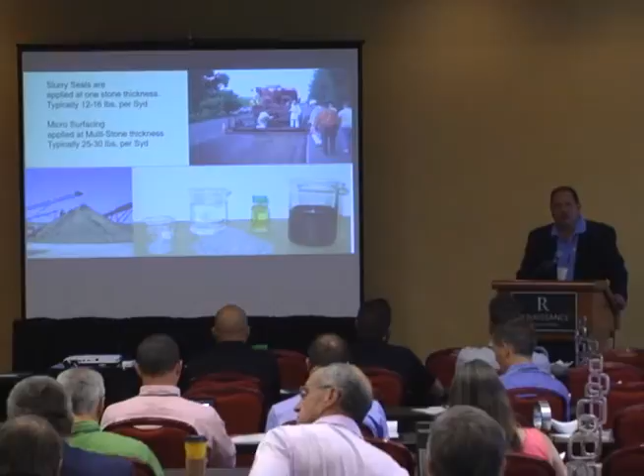We also have water. California, with the drought, the agencies are now demanding that you use reclaimed water, so you can't use the potable water anymore. So we're having the difficulties of trying to figure out how do you manage that in your business. You have additives in different chemistries. So a lot of things have changed here. Unfortunately the picture doesn't really change, and everyone kind of assumes that there wasn't much advancement, but there were a lot of advancements.

So one picture's worth 1,000 words. And so really, when you look at this, I want you to imagine that road that Caltrans showed beautifully in their first presentation, that I-80 with that 3/4 inch rutting, studded tire, chain wear. We see this out west from California into Oregon into Washington into Nevada into Utah. It's a constant problem we have - chain wear just beating the roads, smashing out the aggregates, causing some rutting. Stable road, great performing roads, highly modified roads, concrete roads, asphalt roads - these chain wears just beating the road to death.

So here's pavement preservation, though, in a very harsh environment. Think Lake Tahoe, maybe think the Grand Hyatt right across the lake, Lakeshore Boulevard, 70,000 cars a day, and this is what you see.

This was for Washoe County. They said, you know, we want to start a maintenance program, and we're not doing that. We're doing mill and fills, and every 6 to 10 years we're milling and filling

and we just can't afford it anymore. So to make the case for pavement preservation, we've all heard it, but this picture really just says 1,000 words.

This right here was a conventional slurry seal, type 2 aggregate, 2.5% latex, put down with a conventional slurry machine we know today. Conventional microsurfacing, polymer modified, same aggregate was used in both roads or both lanes. And then we had this over a pavement that had been 4 years old.

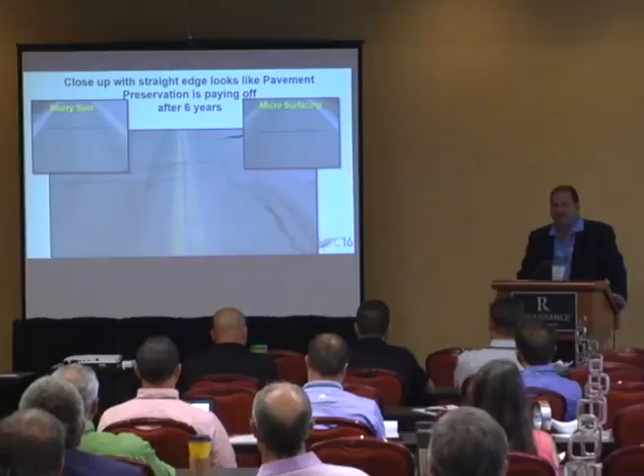We could probably just drop the mic and walk out, like who was that, Kid Rock the other night there? Just dropped the mic on the street and walked away after he sung half a song. It was quite exciting.

NCAT. Let's go down to NCAT, National Center for Asphalt Technology. Right now there's a concurrent presentation going on with Buzz, who's given an in-depth process. I'm going to steal 4 of his slides though.

Obviously at NCAT, we have the heavy vehicle simulators running around the track. These trucks go around so often that the frames actually break and they have to re-weld them. So the trucking companies are learning a lot about durability of trucks and left-hand turns.

So there's NCAT, and you can see that each little test section they got, test section, test section, test section, each little sign there's another test section. Well, we got some maintenance treatments out there. We also have some thin blanket overlays. We have some full sections of polymer modified, different asphalts and different modifiers.

We have Lee Road 159. You got to learn about that. If you haven't followed that, make sure you go to NCAT and learn about this process. It really shows the value of pavement preservation. Most of the treatments we saw yesterday have all been placed down there and are performing pretty exciting. That's a low volume roadway, and then we're taking them out to US 280 for high volume roadway treatments. So I think everyone's familiar with that, but if you haven't, check it out.

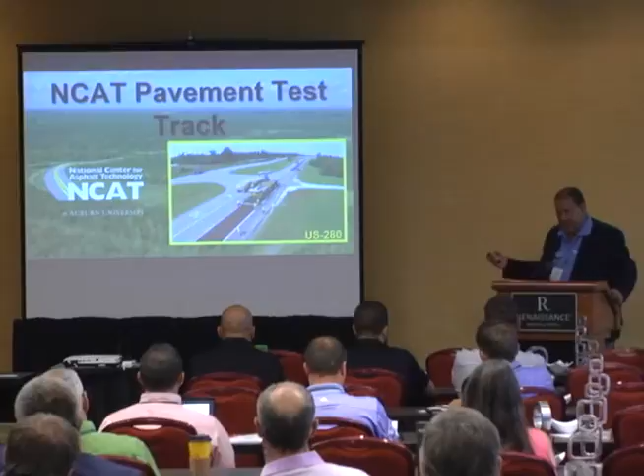But what we did learn from that process is promote real innovation for the industry. So when we took that information, we said, what can we learn from all this research we heard and we saw? The one thing that the guys in my back room learned, and I know other people have been thinking about it, but we really gleaned from this is cracking on this far side here.

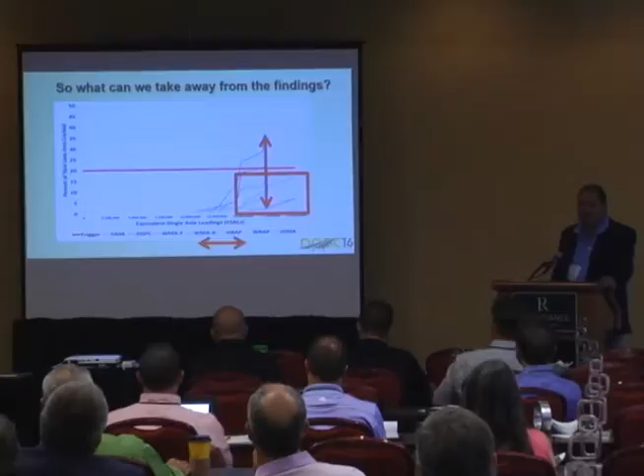But what we see here is, here's a highly modified, high mod, same aggregates being put down, and we don't get crack propagation until 15 million ESALs. That's quite an extension there. I mean, that's saying the value of polymer modification is really huge. There's a lot there. But we're also seeing, look at the amount of cracking that occurs and the speed of cracking that occurs versus that. That's a huge delta there.

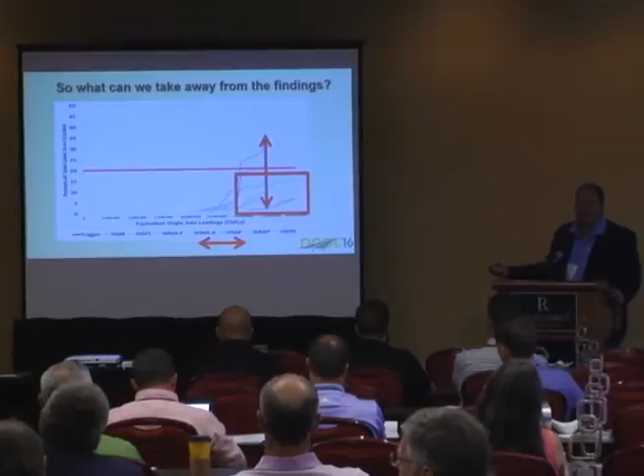So we take that and say, well, how do we apply that? I mean, this is great, this is dense graded pavement, but how do we apply this to maintenance treatments? How do we go from paving at $1 million a mile to something that, how can we learn and put that to pavement preservation? So we do this through pavement preservation, looking at taking that high mod technology and try to extend those lives, move those curves right, the most cost effective way, in thin versus a 2.5 inch or 1.5 inch mill and fill.

We'll talk about that one later.

So what's new and exciting with polymer modification, and how do you get those into maintenance treatments? A 4% polymer modification gets sticky, gooey, gummy, it doesn't do well, it's hard to work. So how do you get something from 4% up to 6% and get performance?

It's very difficult, hard to emulsify is SBR. Historically, some of the Nova chip, Nova bond polymer modifieds for the ultra-thin bonded wearing course, we're about 3% modification.

SBS latexes are great, very effective, but once you start getting into 6%, or having to go to 8%, you start having the chemistries of those latex emulsions override the chemistries in the polymer modification—override the emulsion, I should say. And then you also have the performance from lab to field, which is very different.

So I take a sample from the lab and send it off to Caltrans and say, guys, get me certified. And they say, great, we'll certify you. We're gonna first heat this up, do a distillation. We're gonna distill this wonderful emulsion you sent us at 500 degrees, pull it all out, and test this material to see if it meets spec.

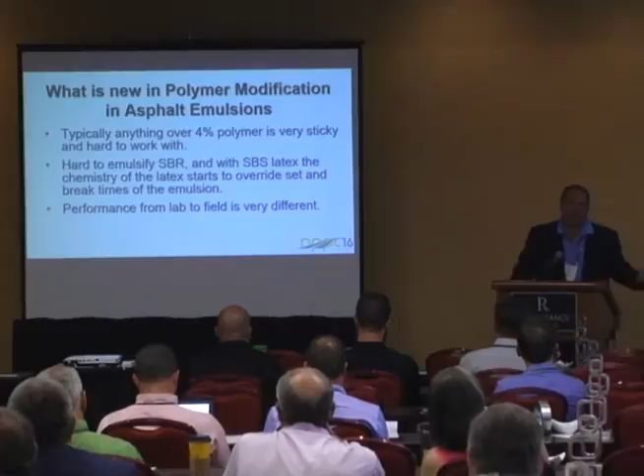So how do you get a low temperature distillation evaporation process to better mimic what we really see in the field? We've come up with low temperature distillation evaporation processes, doing very thin films, letting them naturally evaporate in an oven, keeping it below 180 degrees. That's about the hottest surface temperature I think I've ever seen—right around 180, in Palm Springs when it's 121 degrees, and I'm not quite sure why I was out there.

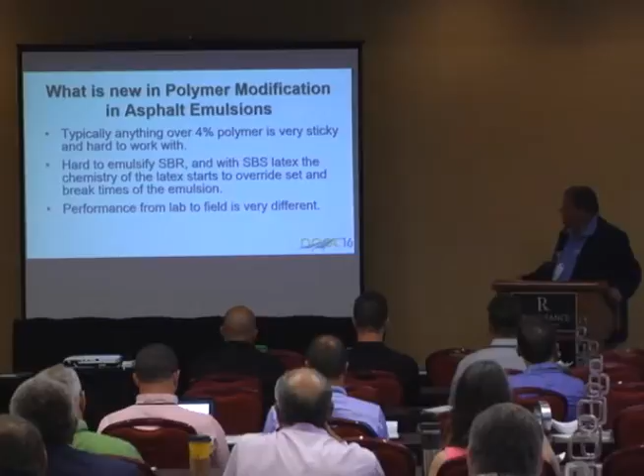So this might be a specification for the future. And this is really looking at—you look at that spec—what do most specs for emulsion have for microsurfacing or CQS?

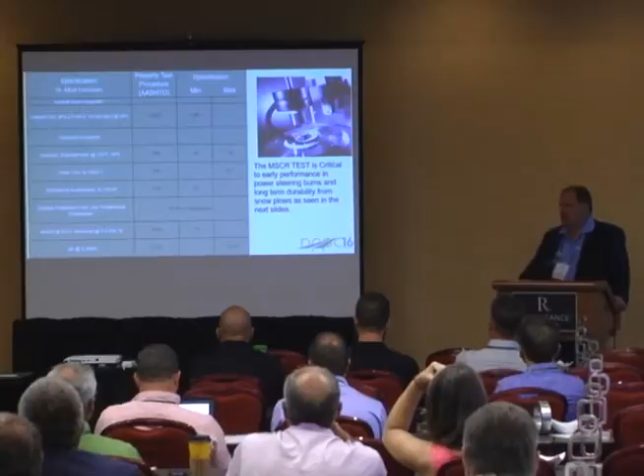Number one would be pen. You want to know how hard it is, and that pen range would be between 40 to 90. We don't have a pen spec here. One might put torsional recovery, a boiling point, or a softening point in a specification. We don't have that in here. We do a low temperature distillation, or this evaporation process, so we're not age oxidizing the pavement. We're trying to truly mimic something that occurs in real life.

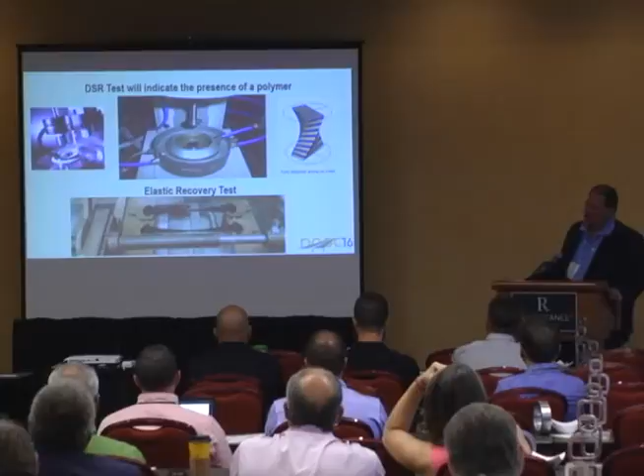but it only tells you part of the story. Elastic recovery tells you part of the story too, but it only tells you that you have presence of polymer at a 500 degree distillation. The elastic recovery process here—basically you stretch the dog bone out, cut it, and measure the recovery. It tells you if you have polymer or not.

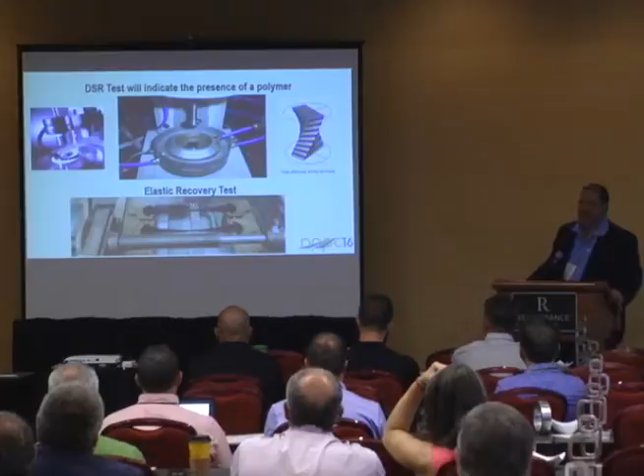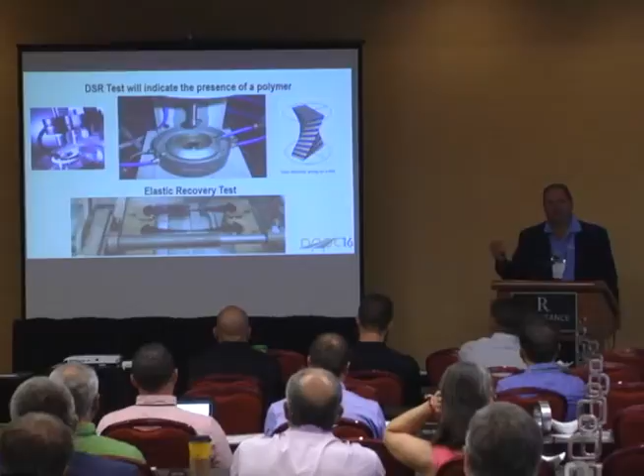The problem, though, is with this test—here's the polymer, we're just getting a little dog bone. The geometry is completely wrong compared to using a DSR. So if we don't change the geometry of our sample, this really doesn't give you a lot of meaningful data. I haven't seen too many roads that get stretched out this far. If they do, we have another problem—it's usually called the San Andreas Fault.

Other elastic material behaviors - we're pulling it, seeing the strain, we'll see flexibility. Well, if we don't do that, our roads - usually we don't pull roads too much, don't pull the rock out. Usually we have little micro strains, little pressures. It's a tire just zipping over a road at 60 miles an hour or going over at 5 miles an hour. It's a very quick strain, very quick release.

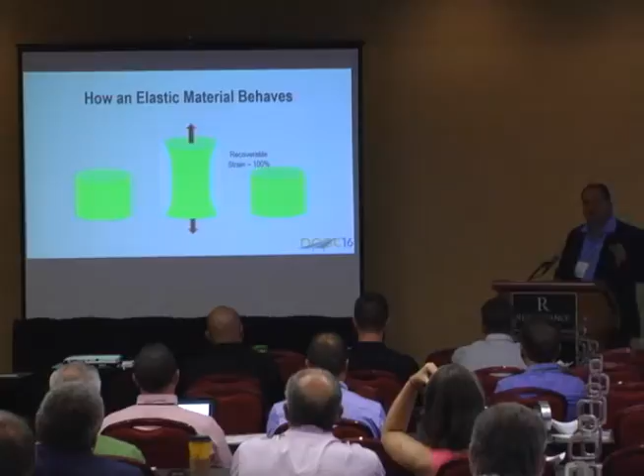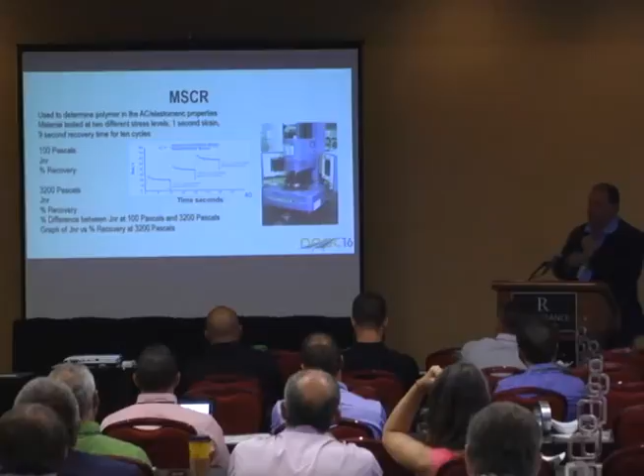So how do we better mimic that? Well, that's by using the MSCR and the DSR. I have these slides in here so if someone wants to read them, they can look online, this is to save some time. Ultimately what we're looking at here is we're going to put a small sample on the DSR, run the MSCR at a frequency sweep, 10 cycles. What this does is it basically puts a little microstrain at a temperature, and it's simulating the recovery.

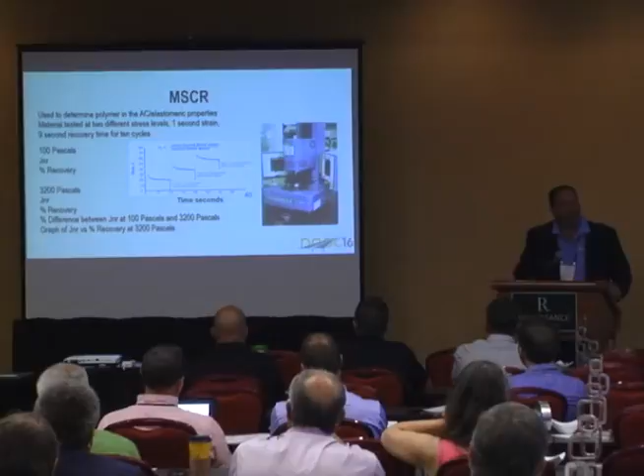So we want to measure - this is where I'd invite you, if you have questions, to talk to Codrin right over here. We want to measure the frequency of the strain and the recovery. That's going to tell us - this slope here is going to tell us the modification. We're going to continue to do this multiple times, 10 times, so now we get a good average. Because that dog bone test, we have 2 samples, we pull it and we cut it. Well, I have 2 samples and 2 averages - do I fail or not fail? I don't have a lot of statistical capability except rerunning the test, redoing distillation.

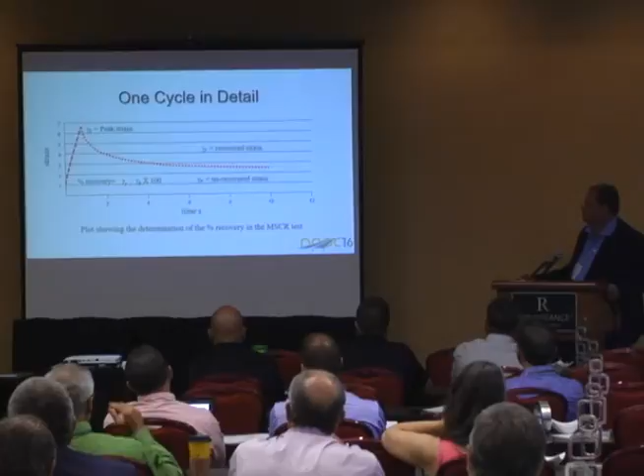But what does that mean? We have this turn, microsurfacing. One of the big complaints we get a lot with agencies, cities and counties, inner city, is power steering. Man, I did the street, we did the parking lot, we have parked cars, and I have power steering burns. And so every agency that does it on a consistent basis is trying to warn the public, saying be careful, drive through, but really don't just crank on those tires. Don't tear it up, be gentle. It will get better next year, let it go through the winter, it will get stiffer. And they always do, they always get better. But agencies don't like to have to explain that to the traveling public. So if I can reduce it by 80%, that's a huge reduction.

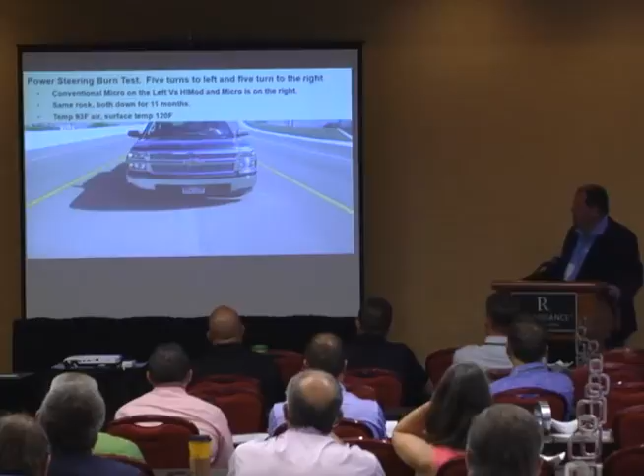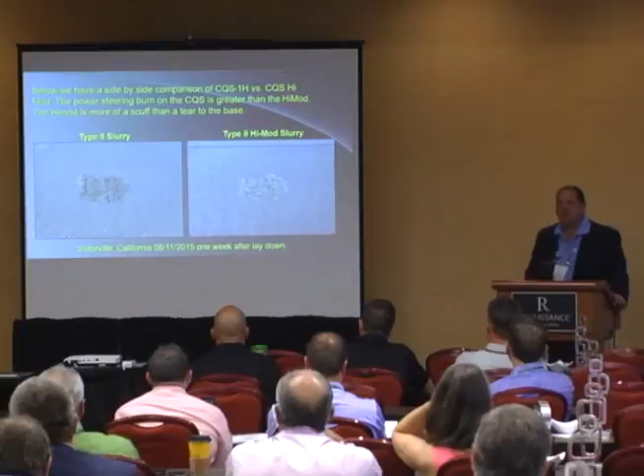And so by using the MSCR test and turning that to torsional recovery, it turns very much into, if you turn your car tire 10 times back and forth, what might it look like? Here's a conventional, and here's the high mod. Same rock, same oil content, same trucks, same crew. But really what it tells you is that highly modified material gives you that resistance to early traffic, the durability.

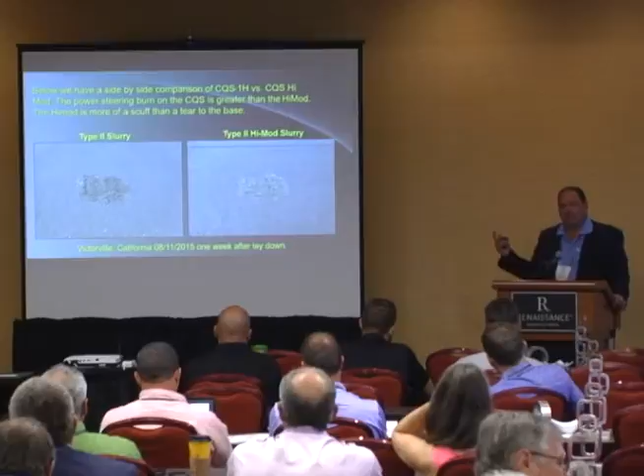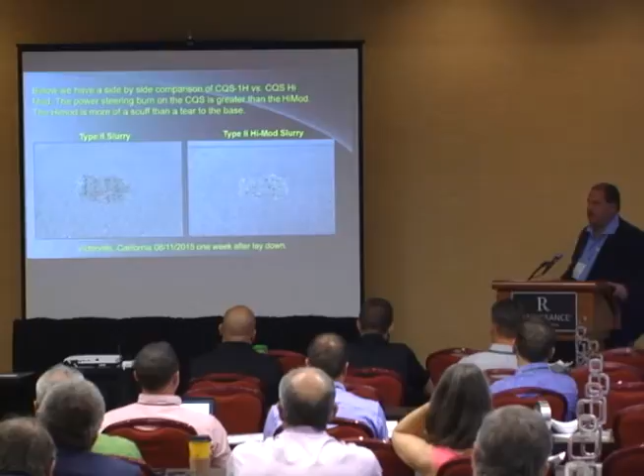So by utilizing this new test method and protocol, we can determine what that softening point was. Now, technically, historically, microsurfacing might have a softening point of 140 on the high side. With these specifications, we can get the softening point up to 160, 168. So it's just creating a tougher, harder, more durable mat right in the beginning when it's the most tender, its most fragile state, right in construction.

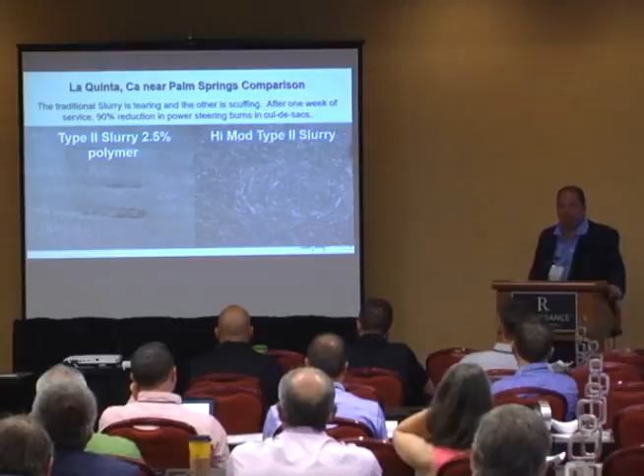Now we go up to New England. So that's what we find critical in California. We go up to the guys in New England and Northern California, and their complaint is snowplow damage. How do I get my durability up? How do I get snowplow resistance? The plows are taking it off, the plows are scarring it, the delaminations from the plows - harsh environment. So we have some testing we're trying to develop for that, trying to set up specifications.

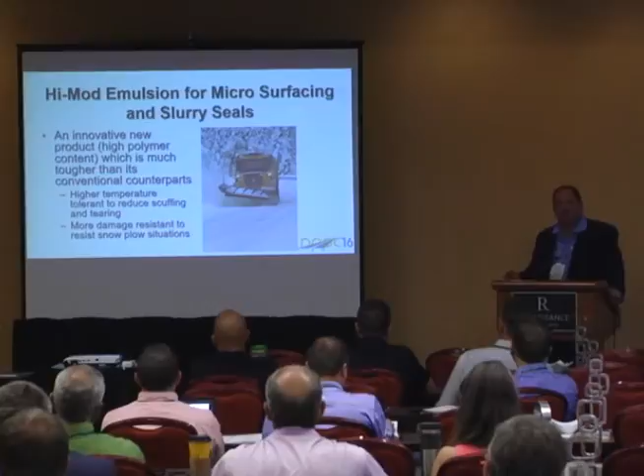So this would be some new technology on the mix design side. If you did a slurry or micro design, this might be your new side on this. We're going to use the Cantabro. What the Cantabro is, is LA Rattler. Every agency that has a lab, has a rock lab in there, has this test. It's just an LA Rattler. Everyone knows it - raise your hand if you know this one.

That's my first job in the lab, was running this thing. So if you don't know, I can't really hear all that well because of this. With that, we're going to put the sample in there. We're not going to put the charge medium in, just the sample.

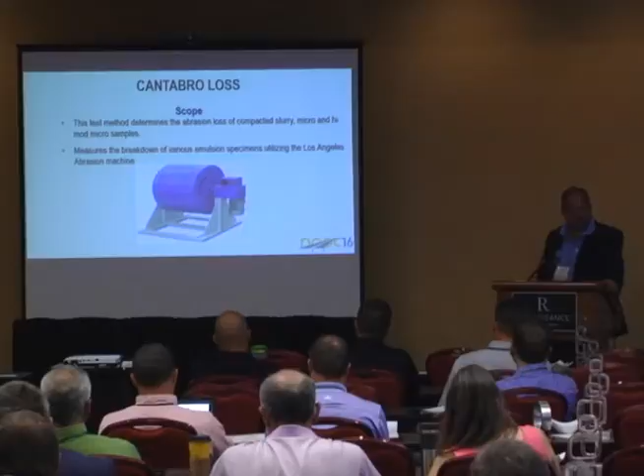It has a paddle, if you've never seen this. It's just a drum with a paddle, no charge medium at all. We're going to let this run 300 times for the Cantabro, or Cantaburo, depending how good your Spanish is. That's who developed the methodology.

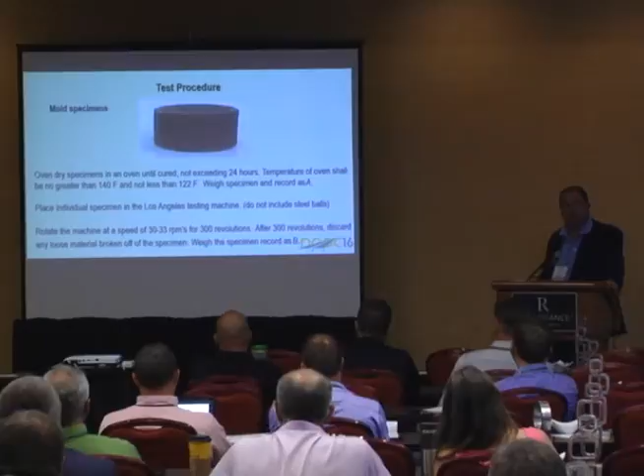We're going to put our sample that we've compacted with a gyratory compactor into the Cantabro. We're going to let it run 300 revolutions and measure the loss. So what does it look like after 300 revolutions?

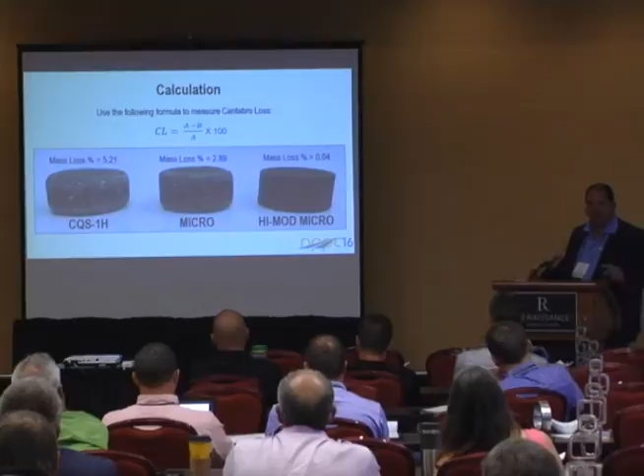Well, here you are with the durability. This is a traditional CQS, slurry seal, non-modified. Then you have your traditional micro, could be 3.5 to 4% modification. And then you have the high mod, which is probably up to 5.5 to 6%, but we're not worried about the percentage of polymer because we have a good test procedure to identify this durability. Same rock in this case, every one of these, same type 2 aggregate, nothing's different, same asphalt content, same residue, put in the Cantabro.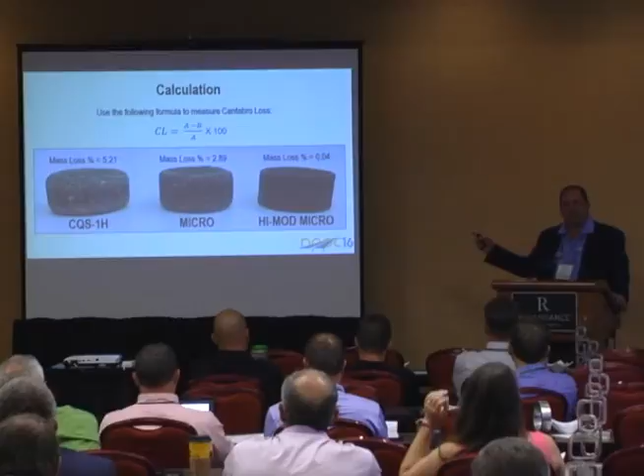So which one do you want on your roadway? Which one has the possibility? Now, if you think about the improvement, we go back to that first picture up in Tahoe, and we saw that CQS slurry with some abrasion. It was time for a micro on top of that. We saw the micro performing, but with the high mod, we're not seeing the damage there. This is the expectation of maybe 3 to 4 years longer life, going back to NCAT, where we saw that extension in traffic before we saw fatigue cracking or cracking develop. This is what we expect to see with this.

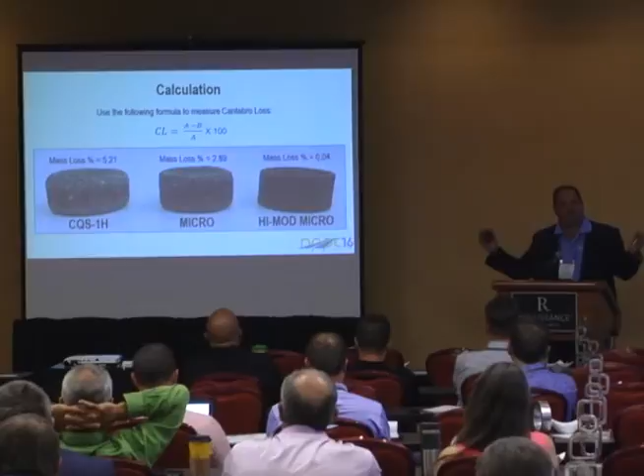Just some other samples.

So this goes to a slide when we're doing some work up in New England. I guess it was Dartmouth in Massachusetts, did a fantastic project. They went and looked at several different deals. They said, we have some plow damage, how do we address this? We need a control section.

We're going to add some different fibers. We're hearing the fiber people say that it can reduce cracking, it can increase durability, and those little fibers would help us with that micro abrasion. So we'll put some fibers in there. We'll try two different fibers - a polyester, a fiberglass fiber, and then we'll try just a high mod.

So here's those Cantabro results in a graphical presentation. And if we go up there today, and I've gone back there, it's a good test section. We had 2 different machines, so we might have had some equipment issues, but we're pretty much seeing what this result here tells us is what we're mimicking in the field. We are seeing one that's performing much better, the high mod. The other polymers or the fibers are performing very well, and the traditional micro is performing as expected. But we are seeing some differences.

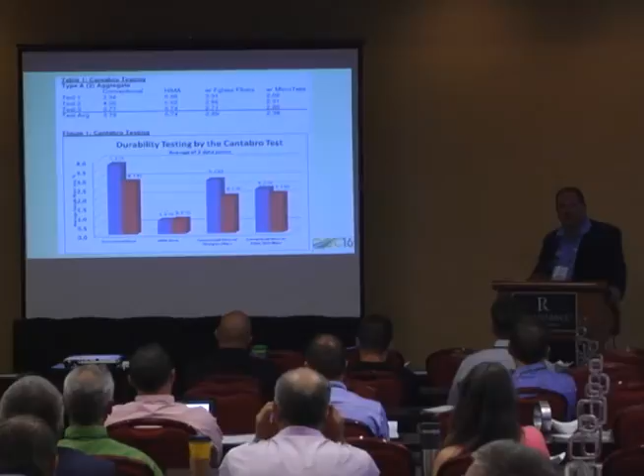This same test result, I believe down in Westchester, in Connecticut, is also being mimicked again. And the contractor is stepping up and said, I'm going to take out the deviation of the machine and use one machine and do all the processes again, just to verify what he had, to take out any construction bias.

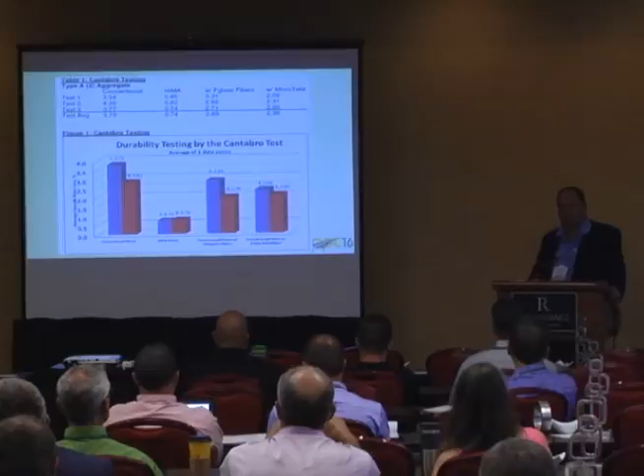There's the first report. This was in 2013 when they did this project. Been out there last year, looked at it. Getting ready to go back out and take a look at it again with another group and see if we can get it right and have a meeting with the agency. But they were here this week and talked to them, and they say it's performing fantastic. The only complaint they had on the whole project was the color of the aggregate.

They had a rock that was traditionally kind of a pink rock, and when the plow abraded it, this pink hue came up, but the paving rock mostly performed out there is a very dark granite. So they look at it and say, well, my road turned pink. We said that's easily fixed - it's just a function of spec'ing the color of rock and going with a darker rock. We spec'd out the darker rock, and they haven't had any issues last year or this year. Everyone's really very pleased with it.

Once again, looking at that specification, you don't have pen, you don't have a softening point. What do we have there?

We've got a sieve - there's a traditional one. The sieve is important, we have a residue, that's important, and we have an original DSR - that's unusual, never heard of before. So this is a completely different specification in this process. If I tell you something twice, it's really important, because that's how I let people know if I said it twice, it's very important. This is a different specification than what we see out there in the marketplace.

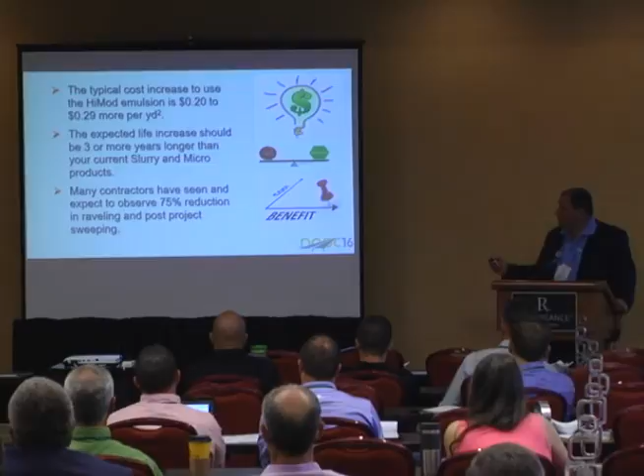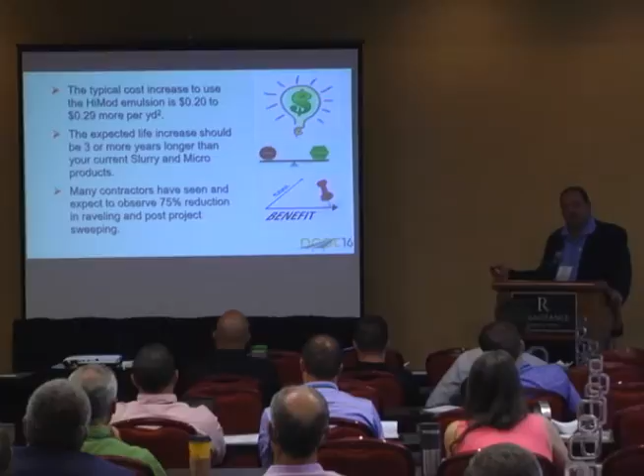The cost varies on thickness, could be 20 to 29 cents more per square yard. Expected increase, we hope to see 3 years - we're only at 2013, we see 3 years of performance, but we do expect to see it with the Cantabro results and the power steering results. We do believe we'll see that increased benefit, because most slurries or micros fail not because they ever really failed - they pass initial construction, they just wear out, they get thin. We're already showing you a wear test, I think it's pretty exciting. Will get us there.

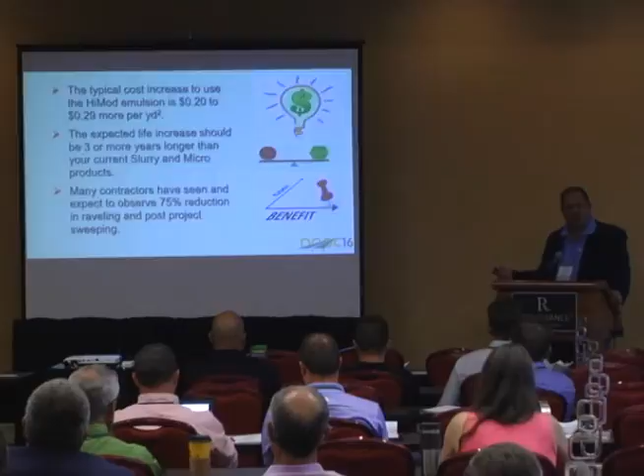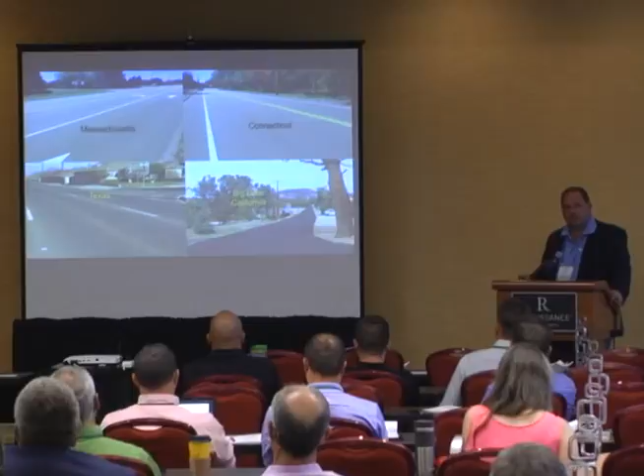Things we have going on: Massachusetts, coast to coast, Connecticut, Texas, Big Bear California - snow environments, hot climates, cold climates, low climates, hot humid climates. We're getting everything covered.

Now, what's next? What's the other complaint we get? Oh, slurries and micros, they crack too quickly. Yep, they just crack - I mean, I put them over a cracked up pavement. I'm not quite sure why we're putting them over a cracked up pavement, we don't recommend it for cracked up pavement. It's keeping good roads good, right?

So we're looking at now, and the boys in the back room are doing a fantastic job looking at this - they're taking a modified Texas overlay tester, which applies a strain to a sample of aggregate. This is what we're seeing with a slurry, we're getting to these cycles here. With a micro that's modified, we're getting to these cycles here. And then with eFlex CR, which is crack resistant, what we did here is increase the asphalt content. These are not all equal, but I think they may be all equal in asphalt content for this testing parameter, but we went with a higher asphalt content across the board to get the most flexibility we could in these results, and we're seeing this huge gain there.

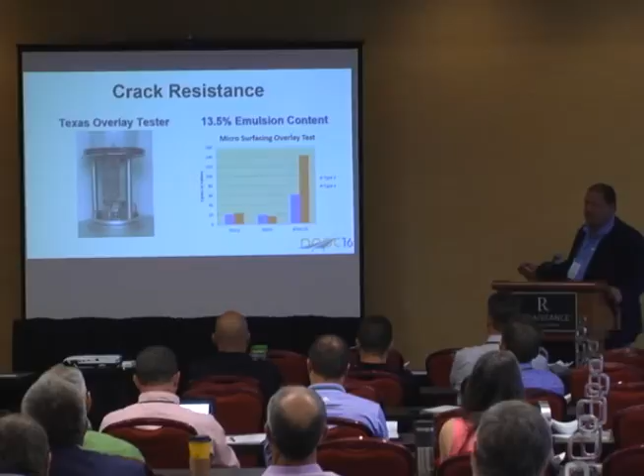But so that's neat, we have a laboratory predictor. Now we had to take these predictors, move them out in the field. We did some projects down in Texas in some alleyways and parking areas near some schools, and had some buses loading over it. So we're monitoring, and we have a team out there doing a fantastic job evaluating the existing condition and going back on a regular schedule to review it. But what we're seeing is the crack reflectivity is reduced dramatically.

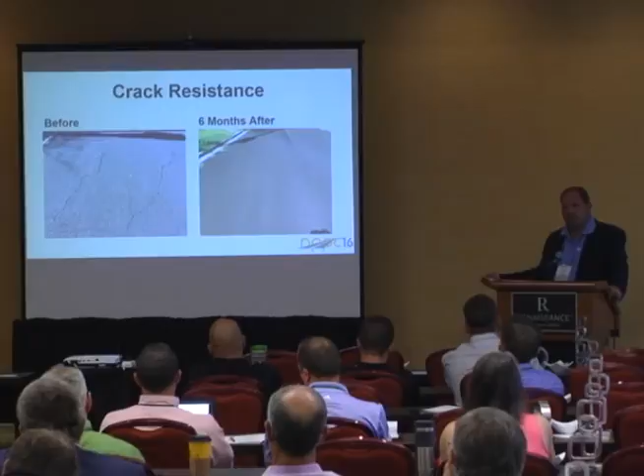This is something we saw in Utah when we did it in 2013 and 2016. Historically, these working cracks, you'd start to see spalling, and you'd see them back at the same size. We're not seeing that after 3 years, so we're seeing great wall adhesion and great durability.

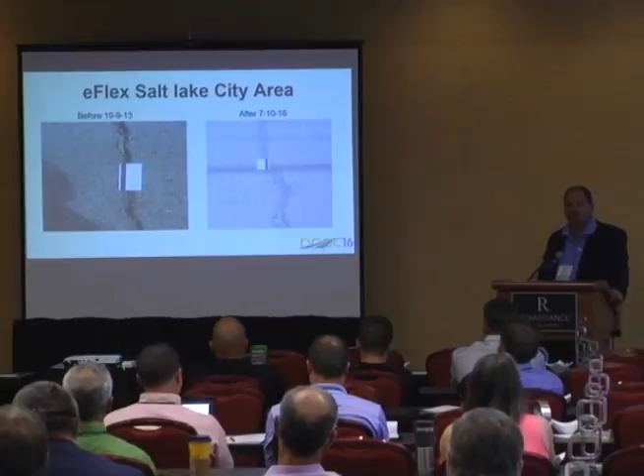Is there a hairline crack there? Yes, there is. But if we had that in a controlled section next to a regular conventional slurry or micro, I guarantee you that crack would be looking much worse after 3 years in the Utah market. So we're very excited about that performance.

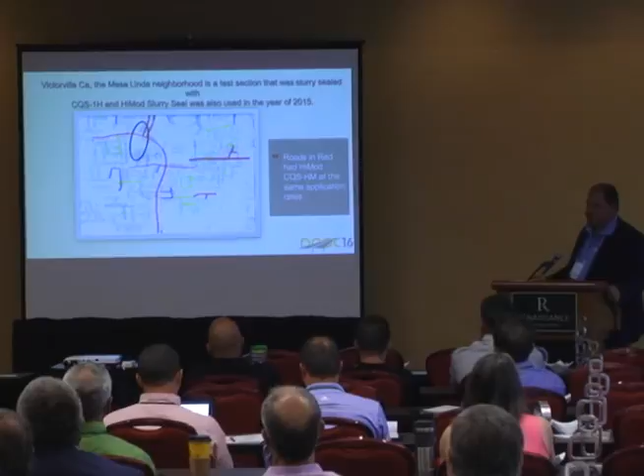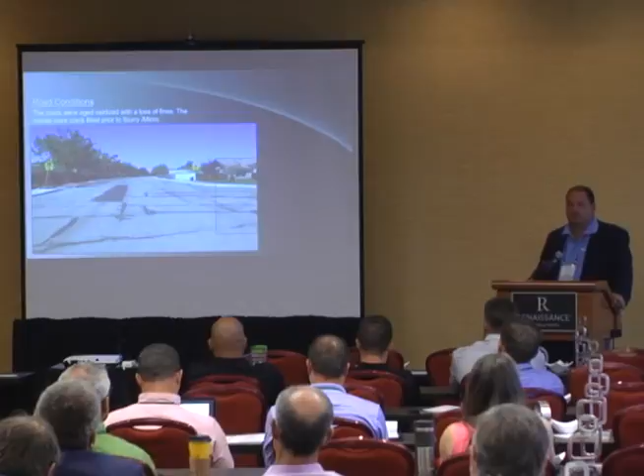Obviously, we do lots of projects comparing different products. This is just a project map showing comparisons, map cracking, checking out all the cracks, documenting, seeing what we have. This is up in Victorville, the high desert, where we get a lot of freeze thaw. It wouldn't be unusual in Victorville in October to see temperatures of 98 to 100 degrees, and the next night be 32. So we get huge temperature swings, lots of thermal cracking, lots of movement up there. We're evaluating that road, and hopefully we'll give you some great data and perspectives on that in the future.

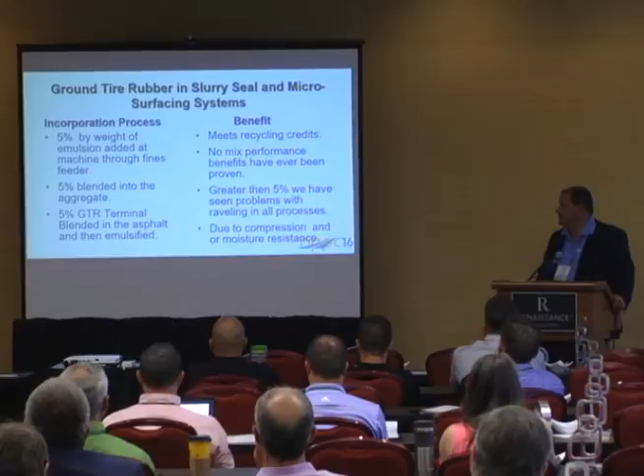Now we're going to move to the ground tires. I had a lot of things I said we'd talk about today, but we're going to move past those into the additives, into that aggregate section we talked about.

So we have ground tires in California. Our legislators are just crazy about ground tires, cuckoo for them really. They want ground tires in everything. There's a mandate, preferential points, you get engineering credits back, all kinds of crazy incentives. So everyone's trying to figure out how to put ground tire rubber in their mix.

Here are 3 ways that are used in slurry and micros currently throughout the state. We have 5% by weight of emulsion added at the machine through an extra fines feeder. We have 5% blended into the aggregate. And we have 5% GTR, a terminal blend asphalt, being blended into the asphalt. So you've got 3 ways of getting it in there.

LA County, San Bernardino County, Riverside County, and San Diego County all consider all 3 methods acceptable and legitimate ways of getting it in there. There's no proprietary issue around that - it's whatever the contractor's choice is. Here are the 3 options. It meets the recycling credits and makes us feel good.

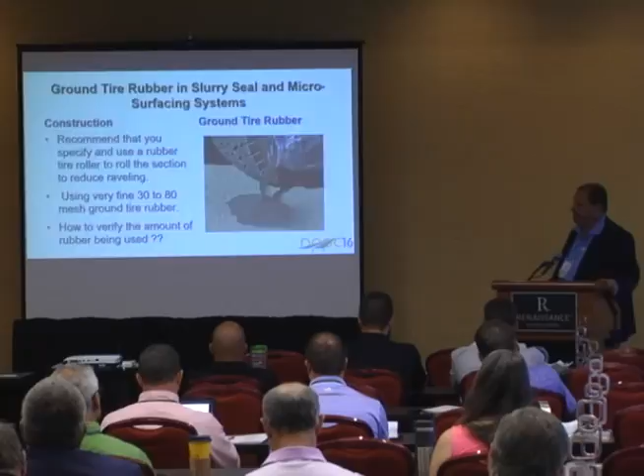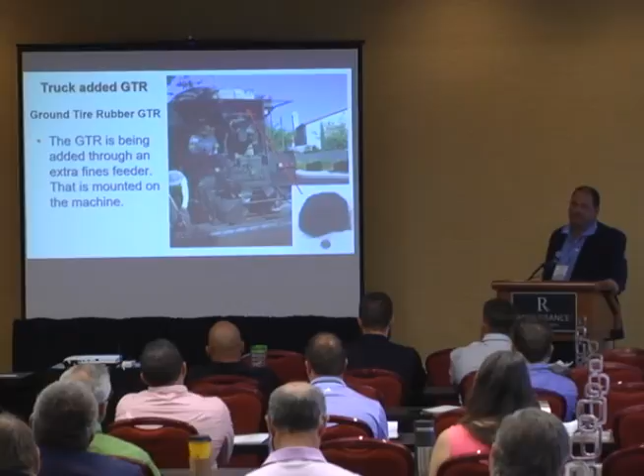Here's that extra fines feeder, adding it into the Pug Mill. This process works really well - I think 4 or 5 contractors have adopted this process. They add the fines here, and it's easily measured, easily inspected, and easily verified. So that's a good way to do it.

City of Ontario has been running a program for the better part of 10 years, maybe even 14 years, and they like it. They also have a requirement of carbon black, so it looks very black.

Here's the terminal blend process, done at the refinery and/or at an asphalt terminal, where they take the ground tire rubber, melt it, apply high heat, and basically carbonize it into the asphalt so you can get a weight certificate, get it in the asphalt, and put it down. That process is done a lot in Texas, and a little bit in California.

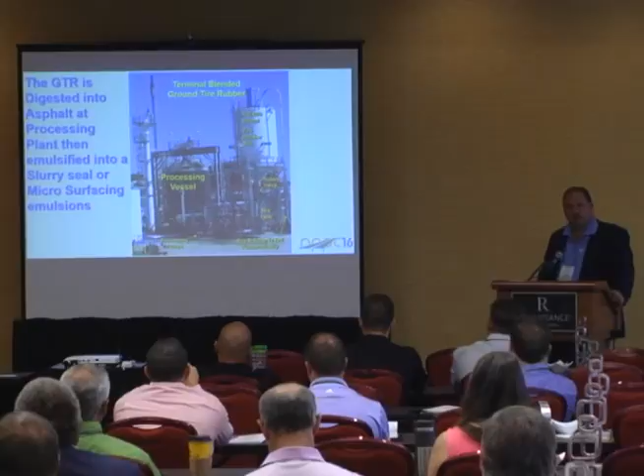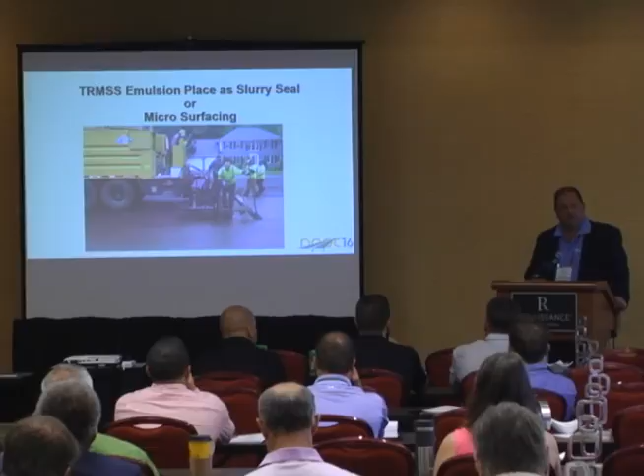Terminal blend, and there it is going down the roadway. It's the product that's in front of my house. So I'll give you the effects: anytime you use tire rubber, you need to use a rubber tire roller. You need that compression, that rebound effect you get during the coalescence stage of the emulsion.

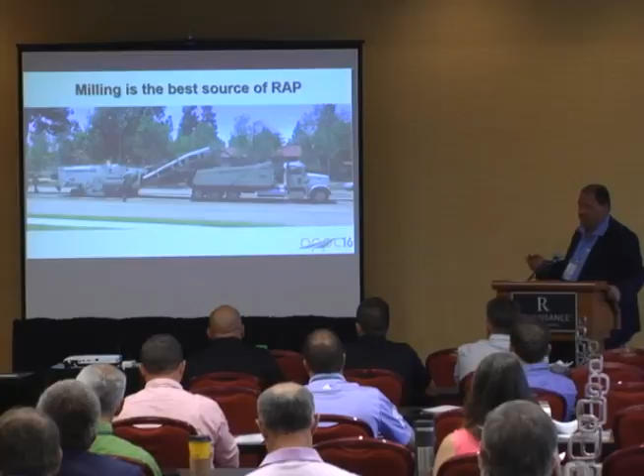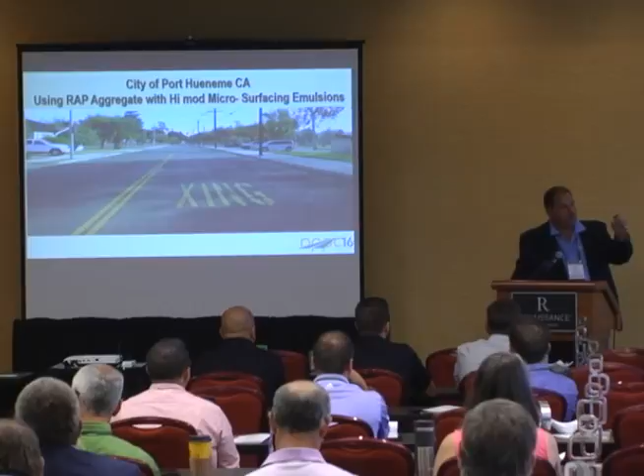Yes, slurries and microsurfacing - you roll? Well, when you're using a ground tire rubber, the rubber itself, those small particles, have that rebound effect. When you're building that cohesive state and you're in that tender zone, if you don't roll them, you don't build that cohesion around the ground tire rubber particle.

And how long, what's the initial rolling time after placement, same day? Two hours, two hours to four hours, same day. And we see a dramatic increase in performance.

I can show you in front of my house - the contractor didn't do it, and it's gone. I mean, it's an embarrassment. It's 5 years old and I only asked for quality. Where he did it on the other street next to mine, yeah, those neighbors are real happy. They love me over there, and my neighbors are like, what the hell did you just do to me?

Millings - when we talk about RAP, millings are best generated if we're going to use it in our recycled slurries, micros, and/or chip seals. They are best captured from the milling machine. You do not want plant waste mix, you don't want cutback, you don't want patches - you want the stuff that comes off that road. So if you do a 1-inch mill and fill, that's the product you want to capture, that top 1 inch.

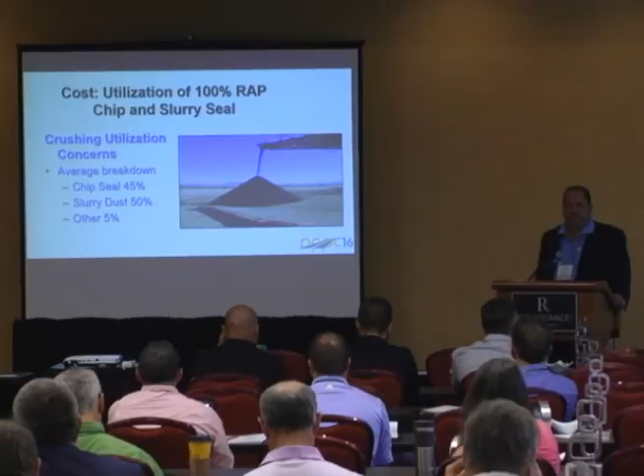We're going to take that material and fractionate it. When you're fractionating it, you produce about 45% of that pile when you put the crusher on it. It's going to produce a chip rock, kind of a 3/8 rock, a little finer than 3/8, almost a 5/16, similar to maybe 8s or 9s. Then you're going to have your slurry dust, about 50%, and 5% other - that's going to be cords, rips, crack sealant, and different things that pop off the other side.

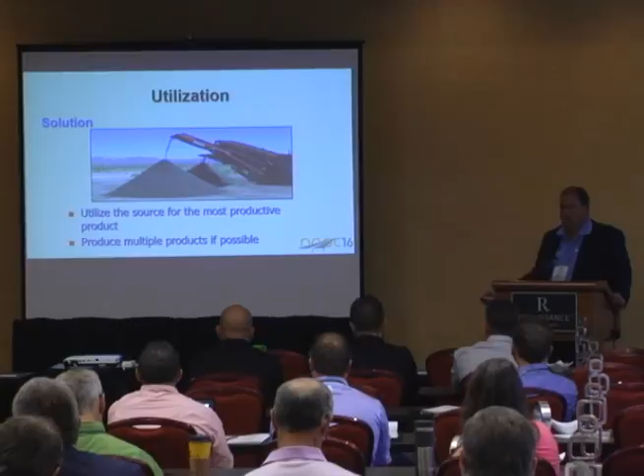Just don't build your stockpiles too early or in the heat of the summer. We're lucky in the West, in California and Arizona, that our pavements fail because of age oxidation, not thermal fatigue. So our effective binder on these RAP materials - if you did Abson recovery and viscosity, we're down to 1 million seconds, 3 million seconds. You could sit there for days and never get through that viscosity tube and say, I think we're done - it's black rock.